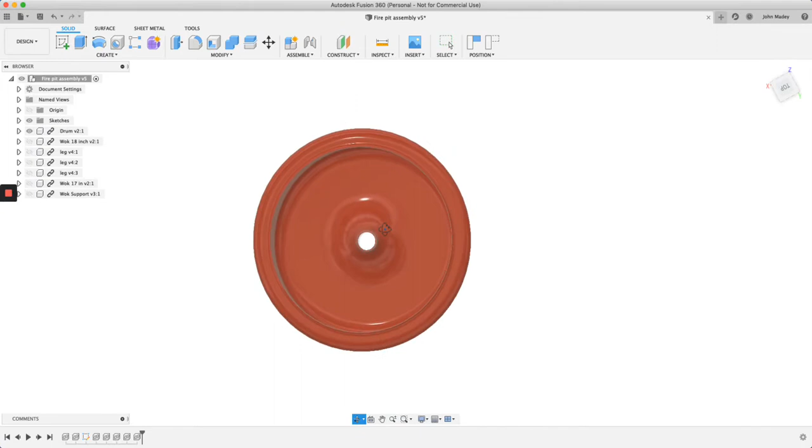What it is, is a washing machine drum, which I had one of these. I had a washing machine fail last year, and when I scrapped the machine, I pulled the drum out of it. I'd seen these things before and thought they were kind of cool, so I figured I'd give one a try and see if I could build one here. I know I could build one, but let's see if we can come up with a cool one.

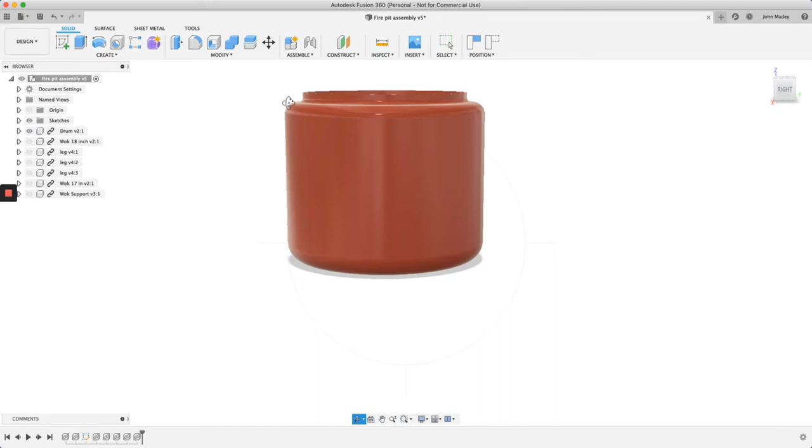This drum actually looks like a dryer drum right now, but it's actually a washing machine drum. There's a ton of holes in it, and this is just a drawing of it. It's about 22 inches in diameter, about 18 inches high or so, maybe a little bit more. This drawing isn't an exact replica, but the important dimensions are exact, which allowed me to start designing it.

For now, I'm going to leave the bottom in it. I didn't find a definitive answer on whether the bottom needed to be removed or not, but there are some holes in the bottom, and I'll show you a bit more how I'm going to fix that.

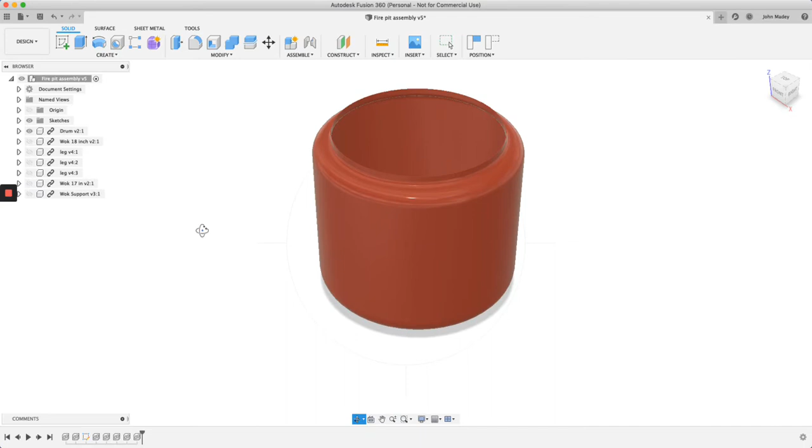The first thing I needed to do was put some legs on it. I designed these legs to keep it up high enough off the grass so it doesn't burn the grass. Then I put these feet on the legs so it won't sink if there's mud or sand there. It could be used in a variety of different environments.

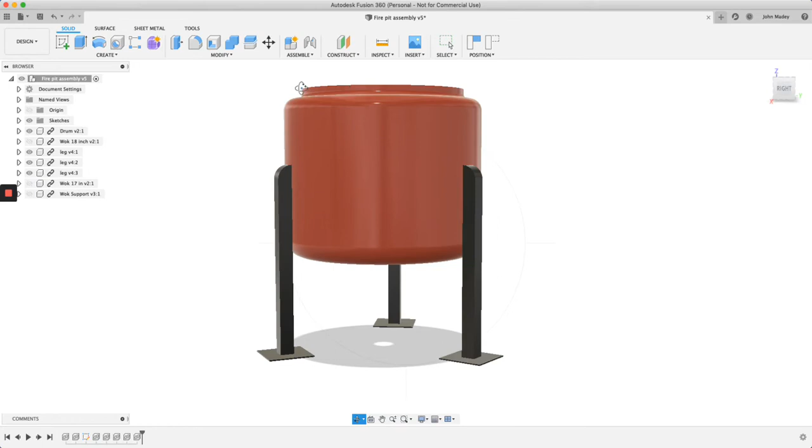I also put a nice little detail on here, or at least I think it's a nice detail, a little curved area on the leg, basically so it matches with the curve on the top. I still haven't decided if I'm going to cut this lip off or leave it on, but for now I think I'm going to leave it on.

So once I had this, I looked at it and said, whoa, I've got to find a way to keep the ashes from dropping out on the ground and poisoning the grass.

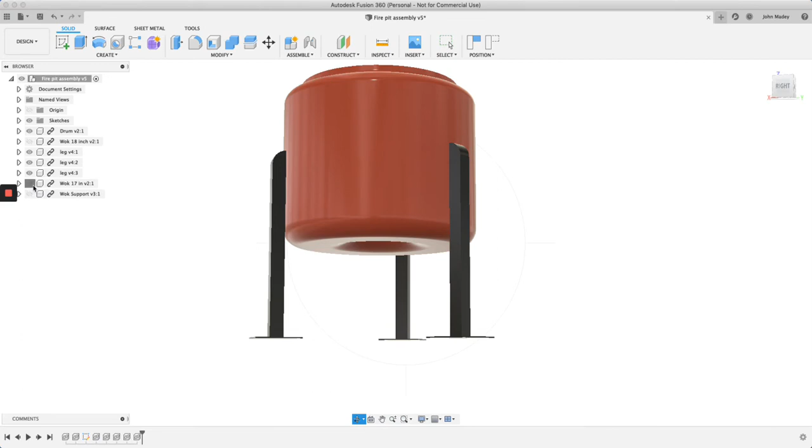So looking on Amazon, I found that a wok, the kind you use for cooking, would work perfectly. And there it is, stuck in there. This one's about 17 inches in diameter, and all the holes in the bottom fall inside the envelope of the wok.

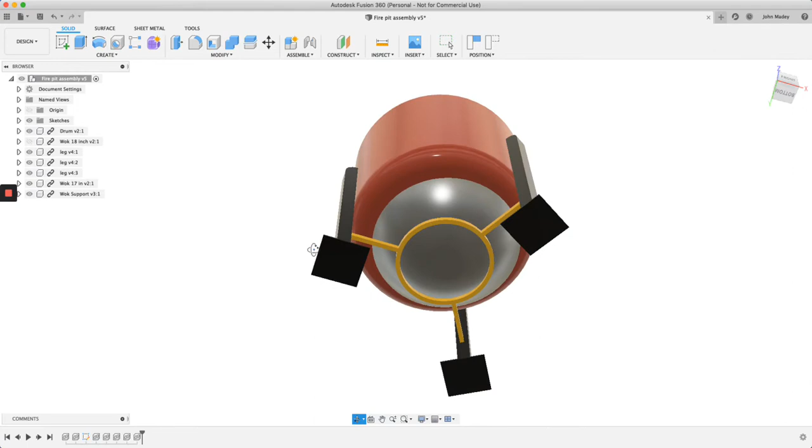Then I needed a way to support it, so I just designed a quick little support for it. I don't know how well this is going to work out, but I think it'll be a good starting point.

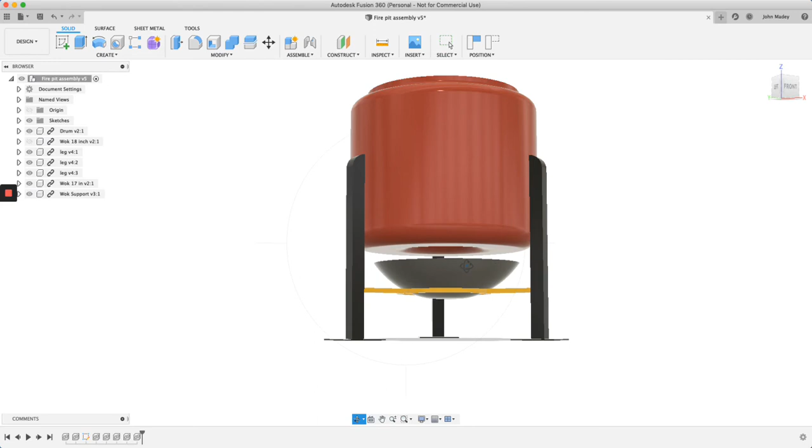It'll hold the tray up, and I should be able to get the tray out. Also, the wok is a small enough diameter that it'll fit between the legs — there's about 18, a little over 18 inches between the legs here for the wok to come out. So I have to be able to position this wok so it fits and nests securely in the tray, but at the same time I'll be able to remove it so I can empty it.

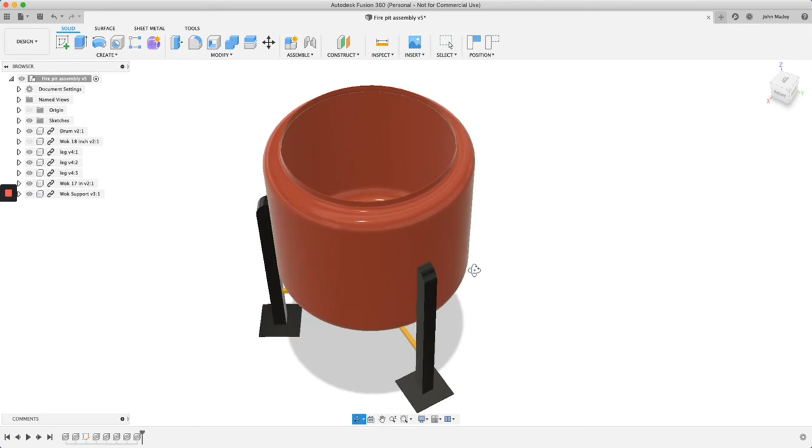So basically, this is the project. This is episode 1 of the series. I've been watching a lot of YouTube how-to videos and thought I would contribute something to the collective consciousness here with my channel.